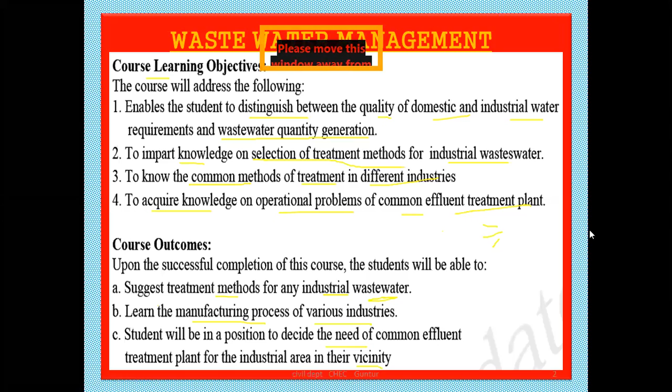Let's look at the unit 3 syllabus. We have the concept of basic theories of industrial wastewater management. Here we are discussing purely theoretical concepts, not problems. We don't have any problems in unit 3, right? We will discuss only the theories of industrial wastewater management.

In this we have industrial waste survey. How are you surveying? What's the meaning of survey? How are you surveying various industries regarding industrial wastewater? How are they storing it? First, you need to find out the source.

Whenever you are doing a survey for industrial waste, first you have to go for the source, where the companies are getting their water from, right? Next, how are you getting the water - through transportation, or through pipelines, or through underground sewer lines. Since we are talking about wastewater here, we are doing a survey on wastewater management. So first we have to see the source of water.

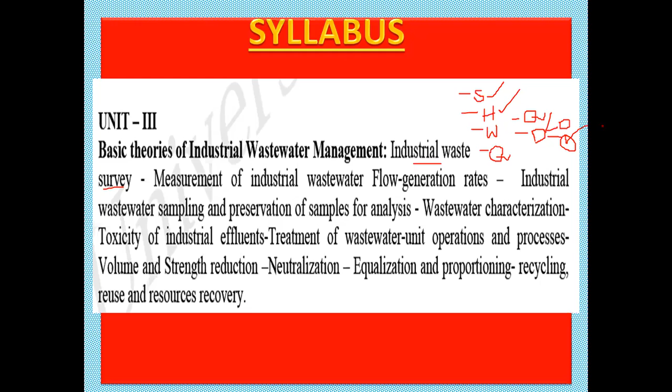So like this, if you get a question about industrial waste survey, you have to write all these points keeping these headlines, and write a few points related to this topic. Got it?

This is the concept explained. So you can write on your own, but related to the question. Don't just write whatever comes to mind - you have to write something related to the question.

Okay, next - measurement of industrial wastewater. How you are measuring the industrial wastewater flow generation rates, right? Next, industrial wastewater sampling - how you are going for the sampling of wastewater and how you are preserving the sample for analysis.

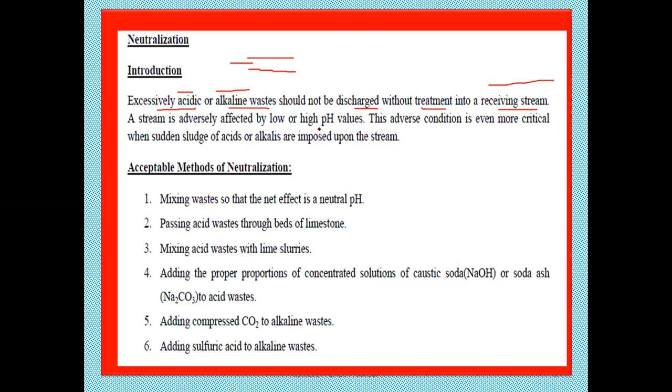A stream is adversely affected by low or high pH values. We get differences in pH values whenever entering the stream. This adverse condition is even more critical when sudden sludge of acids or alkalis are imposed upon the stream. So what happens when you discharge without proper treatment in the pipeline or discharge stream?

You get sludge formation. The sludge, that is scales, different thick layers of sludge will be formed in the pipeline. Thereby obstruction happens in the pipeline, that is the receiving stream. So you get these problems whenever you are not treating the wastewater where alkaline waste is present in the wastewater.

Next, what are the methods of neutralization used for this type of process? First one is mixing waste so that the net effect is neutral pH. Whenever you add other waste inside the water, the pH value doesn't go up and down, it remains neutral, meaning equal to 7, less than 7, or greater than 7. So we have 3 types of pH.

Next, passing acid waste through beds of limestone. So what you are doing in this other method is passing the acid waste through a bed of limestone. Beds means just a layer of limestone slabs, and we pass the acid waste through it.

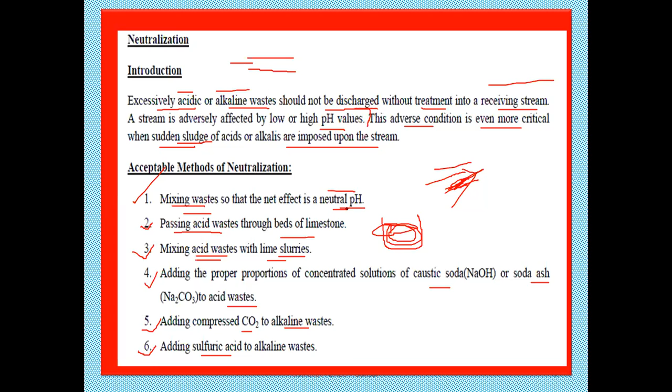Next one is equalization, neutralization and equalization. Equalization is also a method of retaining the waste in the basin so that effluent discharge is fairly uniform in its characteristics. What is the meaning of equalization here? It is a water treatment method of retaining the waste in a basin. Basin means the water container having retaining material.

So it's a method of retaining the waste. Retaining means holding the waste in a basin so that effluent discharge is fairly uniform in its characteristics.

Then what are the characteristics here? pH value, color, turbidity, alkalinity, BOD, COD etc. We have already studied all these in Environmental Engineering subject, Unit 3. So there is no doubt about this one.

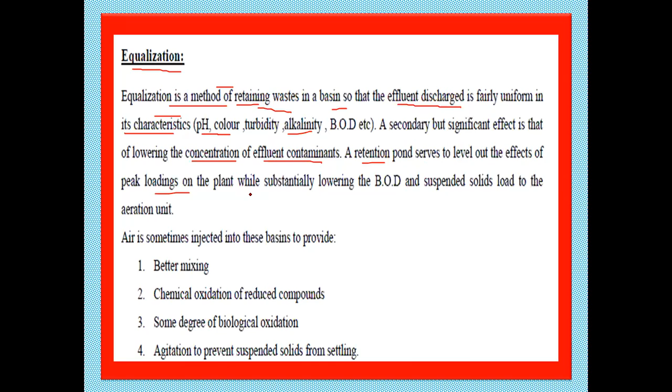Next, a secondary but significant effect is lowering the concentration of effluent contaminants. A retention pond serves to level out the effects of peak loadings on the plant while substantially lowering the BOD levels. So in order to reduce the biochemical oxygen demand, the water in a retention pond should serve this purpose.

So in this equalization method, we have to retain the waste in the water basin so that it is fairly uniform with these characteristics.

Next, air is sometimes injected into these basins to provide better mixing in the equalization process. Aeration means use of oxygen or use of air, and air is sometimes used in these basins for better mixing of the materials.

Next, chemical oxidation of reduced compounds should be done for reducing the compounds. Next, there should be some degree of biological oxidation present in the basin. Next, agitation to prevent suspended solids from settling.

Settling means sedimentation. So we have to avoid the sudden rushing of the materials to prevent suspended solids from settling. Agitation means a state of nervous excitement, so sudden rushing of the material should be prevented from the settling process. These are the methods used in this.

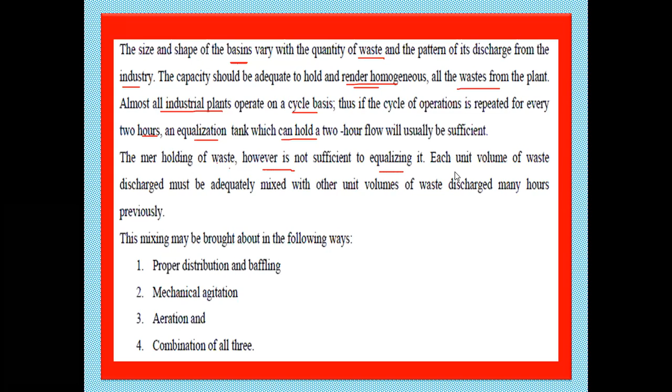The mere holding of waste, however, is not sufficient for equalizing it. Each unit volume of waste discharged must be adequately mixed with other unit volumes of waste discharged many hours previously.

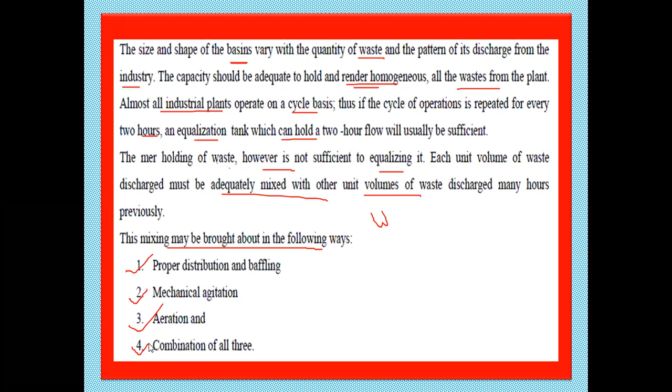So the mixing may be brought about by the following ways: proper distribution and baffling, mechanical agitation, aeration providing oxygen, or a combination of proper distribution and baffling, mechanical agitation and aeration process. These are the things involved in this equalization process.

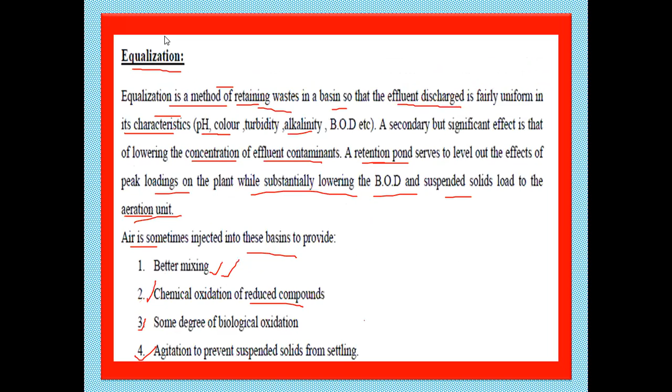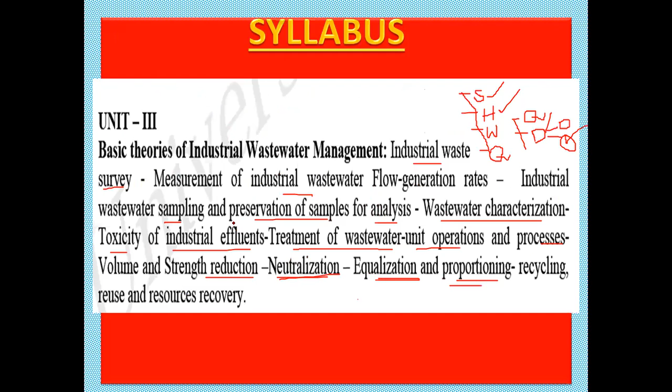Next, proportion. Proportioning means the discharge of industrial waste in proportion. We have to discharge the industrial waste from the industries in proportion to the flow of municipal sewage in the sewers or the stream flow in the receiving river. So proportioning means we have to discharge the industrial waste in proportion to the flow of municipal sewage in the sewer pipelines, or in the receiving river.

In most cases, it is possible to combine equalization and proportion in the same basin. In the majority of cases, some industries mix the equalization and proportion stages in the same reservoir or basin. The effluent from the equalization basin is metered into the sewer or stream according to the schedule. Metered means measured, determined, and it is sent into the sewer system at proper intervals, according to schedule.

The objective of proportioning in the sewers is to keep a constant percentage of industrial waste to domestic waste flow entering the municipal sewage plant. So we have to maintain some percentage of industrial waste to domestic waste flow in order for it to enter the municipal sewage plant. Then what is the procedure? The procedure has several purposes.

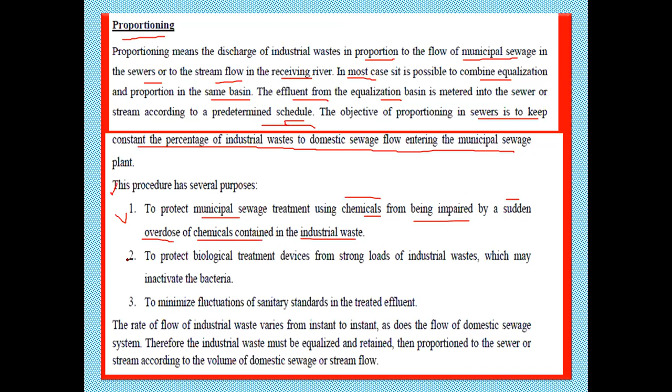That's why the procedure of proportioning should be done. The next purpose: to protect biological treatment devices from strong loads of industrial waste, which may inactivate the bacteria. So to avoid destroying the bacteria, we have to protect the biological treatment devices from the strong loads of waste coming from the industries.

Third point: to minimize the fluctuations of sanitary standards in the treated effluent, so that we can treat the effluent process in a proper way. Next, the rate of flow of industrial waste varies from instant to instant, as does the flow of domestic sewage. Therefore, the industrial waste must be equalized and retained, then proportioned to the sewer or stream according to the volume of domestic sewage or stream flow.

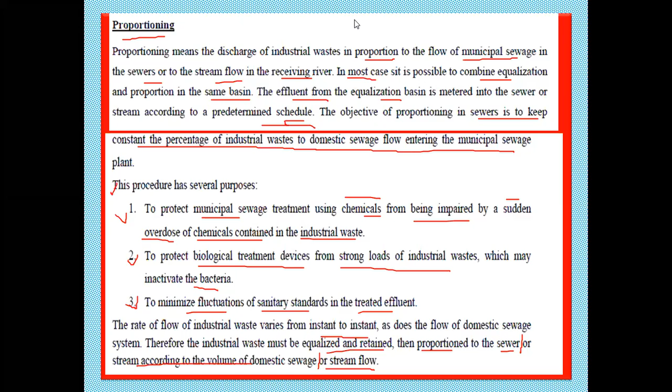So the next topic is volume reduction process. Among waste reduction alternatives, we have the volume reduction process. I think the volume reduction is there. Students, observe that volume reduction is there in the syllabus, right?

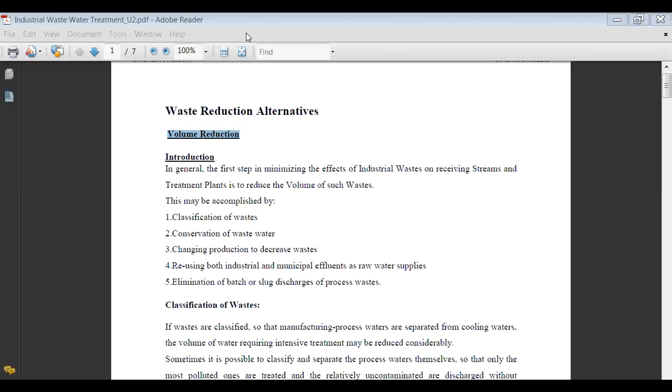The volume and strength reduction. Okay, so we'll discuss these topics now.

The waste reduction alternatives.

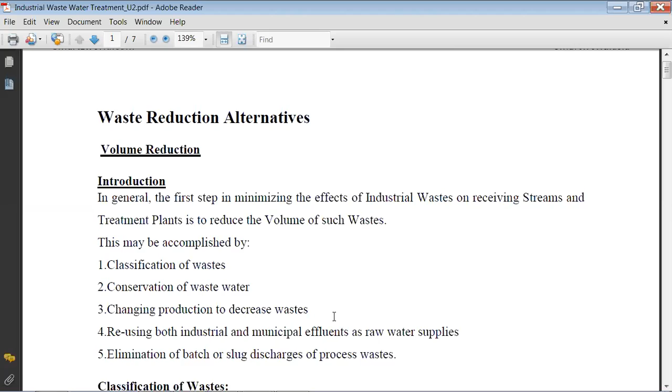Next, coming to the classification of waste, there are three types. In the manufacturing process, waters are separated from the cooling waters. The volume of water requiring intensive treatment may be reduced considerably. So the three main classifications of waste are: waste coming from the manufacturing process - since we are talking about water, we write points about water. In any manufacturing process, there is waste coming from the manufacturing process.

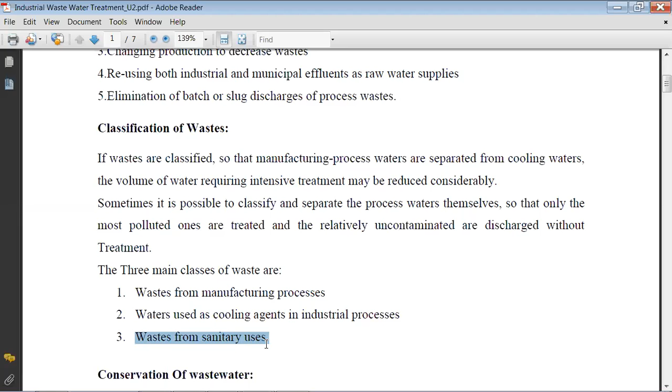Waste coming from the sanitary uses. In industries, you have big firms with different office units. Sanitary waste means waste coming from the canteen, coming from your toilets, coming from your washrooms, coming from cleaning of any vehicles. So there you have to reduce the wastewater.

Next, conservation of water. Here water is conserved - the water conserved is the waste saved. When we conserve water, it's as if we are saving waste. Conservation begins when the industry changes from an open to a closed system - that is, when an industry changes from an open process to a closed process.

Introduction of conservation practices requires a complete engineering survey of existing water use and an inventory of all plant operations using water and producing waste. So what conservation practices require is that we have to go for a complete engineering survey of the industry - how you are storing water, how much existing water there is, how much future water is needed, what water is already used, and how much water is in inventory. So you have to cover all these things whenever you go for a complete engineering survey, so that they will develop an accurate balance for peak and average operation conditions.

Once you get the survey, we can make an accurate balance sheet of peak versus average operating conditions. When in peak production process, how you are operating the water, versus when in average conditions, how you are operating the water.

For example, steel mills reuse cooling waters, and coal processors reuse water to remove the dirt and other non-combustible materials from the coal. So taking the example of steel industries, they reuse cooling waters, so water circulates, and whatever water is wasted, that reused water is used for the coal process to remove dirt and other materials from the coal.

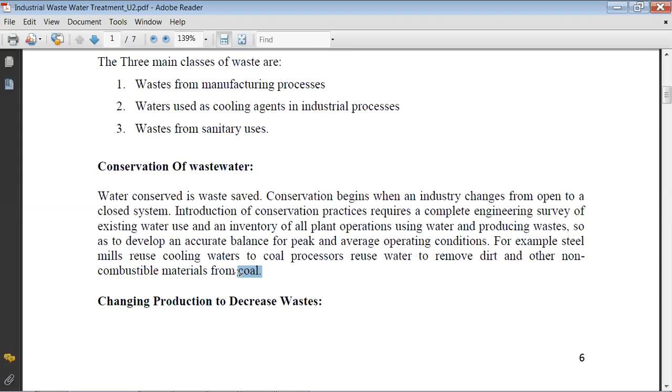So like this, you are using water somewhere, at some place, in the industries also, right?

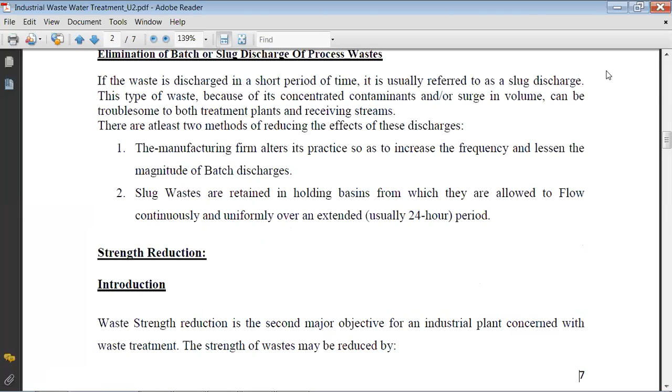Next one is changing production to decrease the waste. So we reduce production to decrease the waste, we go for changing in the production. This is an effective method of controlling the volume of the waste, but it's difficult to put into actual practice, right?

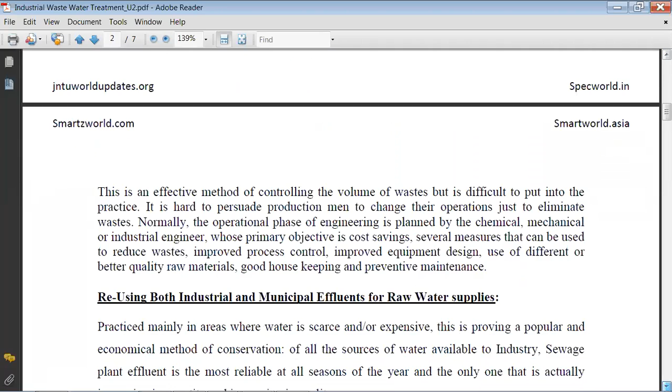So we have to use reusing both industrial and municipal effluents for raw water supplies, right? All this you should study on your own, it's very self study, you can do it.

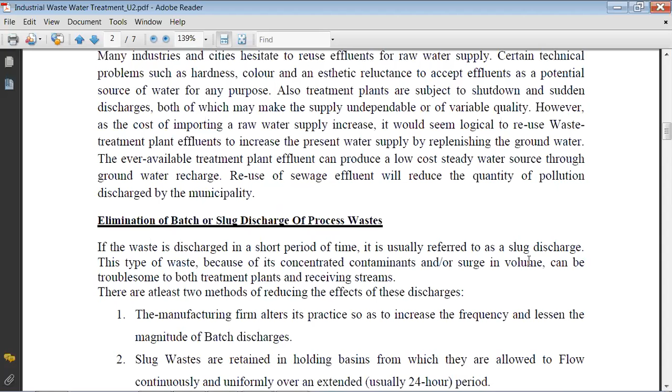Elimination of batch or slug discharge of process waste. Simply put, the manufacturing firm alters the practice to increase the frequency and lessen the magnitude of batch discharges. So whenever you are going in a normal process, try to convert it as a batch process, practicing new techniques so that you can reduce the waste. There are at least two methods of reduction of effects of discharge.

Slug wastes are retained in holding basins, from which they are allowed to flow continuously and uniformly over an extended period. For example, to explain simply, there is a theater where the same movie is shown continuously - that's the old traditional process.

Nowadays, if you see in some villages, theaters show one picture in the morning and another in the evening. Right or wrong, they are altering some practices, thereby getting the people and getting the money. In the same way, we conserve water in different styles, in different batches, at different timing periods - we have to either discharge or retain the water. That is what we are discussing in this process.

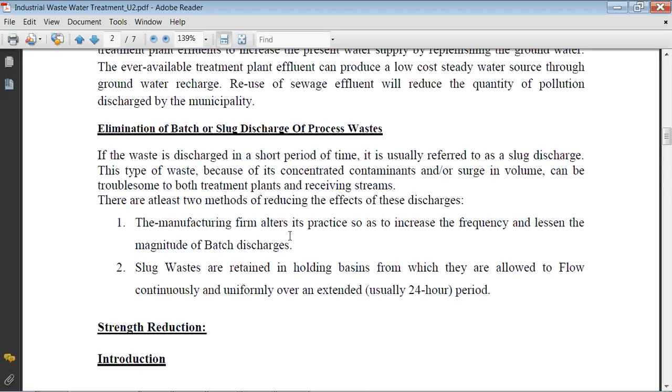So, strength reduction process. I'll send you the PPT PDF, just open it and we can check the process.

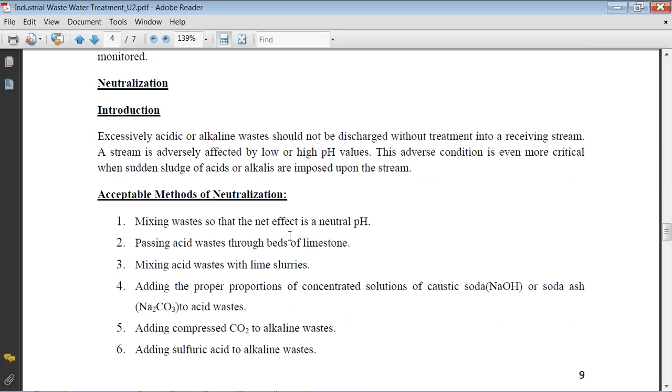We'll discuss the wastewater characterization, flow generation rates, toxicity of industrial effluents, treatment of wastewater, and the sampling methods.